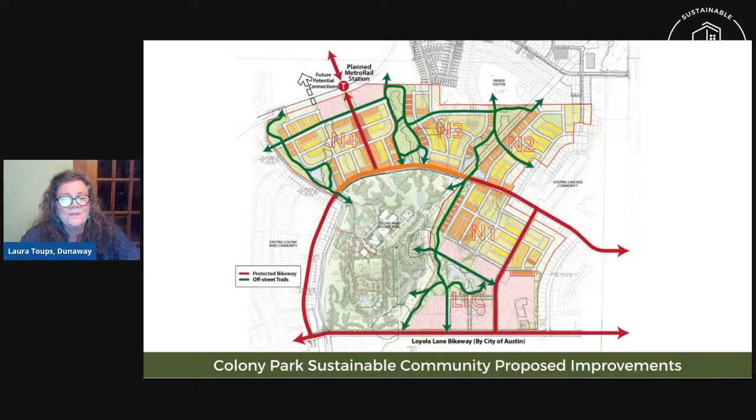Next, we're going to have a discussion of safety and connectivity goals. The Transportation Department will talk about what data they use to help advise how to improve safety here. Laura Dierenfield will be presenting. Thank you, Laura, and thank you all for being part of tonight's broadcast, and for anyone watching this afterward.

This section talks a little about the safety and connectivity goals that speak to those key pillars Laura mentioned a moment ago. It's truly been a humbling and great privilege to be part of this team with so much from the community represented in this plan. As far as safety and connectivity, the goals here are to make a safer street for everyone who uses Colony Loop Drive, to connect it so it can offer the access needed, from Loyola Lane to Decker Lane, to and from and within this beautiful existing and blossoming community.

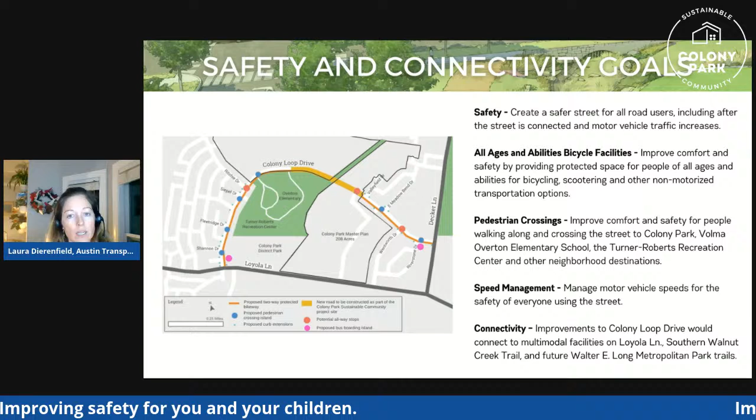Along the way, it will be a street that can offer an all ages and abilities bicycle facility, which is to say it is a street that a child or someone just new to bicycling, or someone who might be a little unsure, would feel comfortable being able to bike along this street to get where they need to go, whether that's to the store or to school or to a friend's house.

Additionally, you'll see several locations where new pedestrian crossings are proposed to better access the existing and new assets that would come on through the Colony Park Sustainable Plan, to include the new park and many other amenities. Getting across the street also helps to calm the street and make it a residential street for everyone to safely use at all times of the day.

And as I mentioned, the connections, both to not only Decker Lane and Loyola Lane, but also to all of the other residential connections throughout the community, as well as to the park and trails and other community assets.

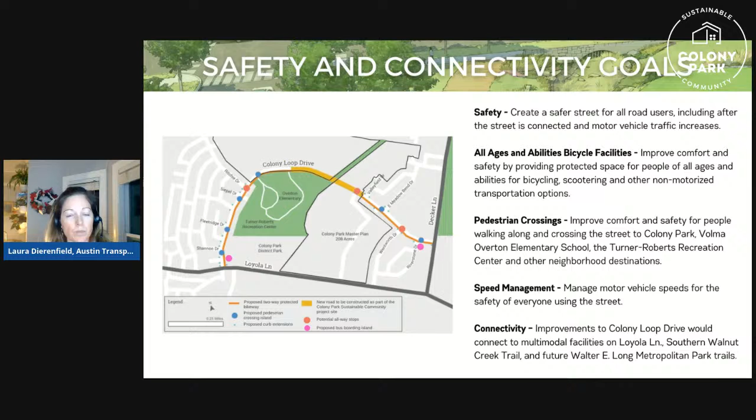The Transportation Department, in pursuing the goals of the Colony Loop Drive Complete Streets design, looked very critically at residential parking. This is an important function of any street, especially one that serves people getting to and from their homes. But it also needs to be a street that is safe enough for everyone to use, whether it's your child going to school or if you're biking to the store.

And so we want to understand how we can best manage the important role of parking with the space we have available, both on the existing sections of Colony Loop Drive as well as the new section, to maintain vehicle access, parking, and safety. So what we do is we study parking utilization at many different times of the day, days of the week, both weekend and weekday, and we look at how much parking demand there is at those different times, appreciating that it can fluctuate depending on the day of the week or time of day.

In our analysis of parking demand, we found that generally speaking, use of parking on the street is generally below 25%, with some areas upwards of 50% parking demand. Those areas are Wentworth Drive to Riverstone Drive and Pondsdale Lane to Fleetridge Drive. But even at 50% utilization, you can modify the parking to maintain that important function of the street, but also use the space to bring about some of the safety and connectivity goals that I mentioned.

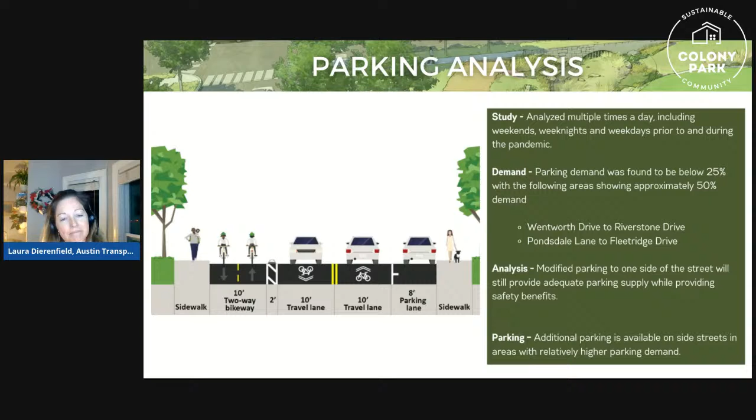It also allows for biking side by side, as a child and a parent might want to bike together, or if a spouse are walking together or biking together, there's ample space to do so.

And we know from research that these crossing islands can reduce crashes by 40% because of those properties. Parking, as I mentioned, would remain on the north and west side of the street, except in some areas where the taper will allow for these new crossing islands to be offered, to help get people across the street to the school and the park and other destinations.

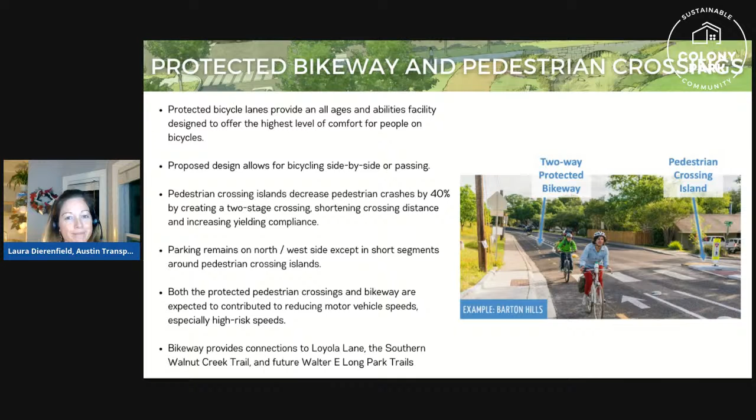And so I'm going to turn this over now to Candace Craig to talk a little bit more about the proposed improvements.

Thank you, Laura. So the purpose of the next series of slides is to show the location of the proposed improvements, renderings of each type of improvement, typical street sections, and a bird's eye view of part of the plan.

So on this slide, you can see this is a map that shows the location of the proposed improvements. Don't worry if you don't know what some of these improvements look like. I'll show you pictures of each of these in the following slides.

So first, in the light orange, is that gap section that Laura Toups had talked about earlier on in the presentation. This is the connection of Colony Loop Drive, so you'll have a continuous road from Loyola to Decker Lane.

Next, along the east and south curb line is a two-way protected bikeway. Where you see the three red octagons at Ritchie, Wentworth, and a future intersection in the gap section are potential all-way stops. Next, where you see those little blue dots are the curb extensions, sometimes called bulb-outs. I'll show you some pictures of what that looks like in the next few slides.

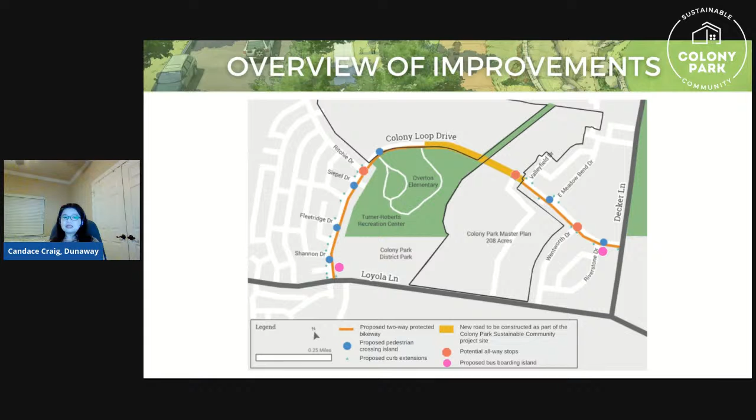So the next few slides are examples of what these roadway improvements look like. This first one is a rendering of the refuge island proposed at Colony Loop Drive and Siepel. The people you see walking across the crosswalk are heading east toward the new pedestrian bridge to the new park that opened this year in March.

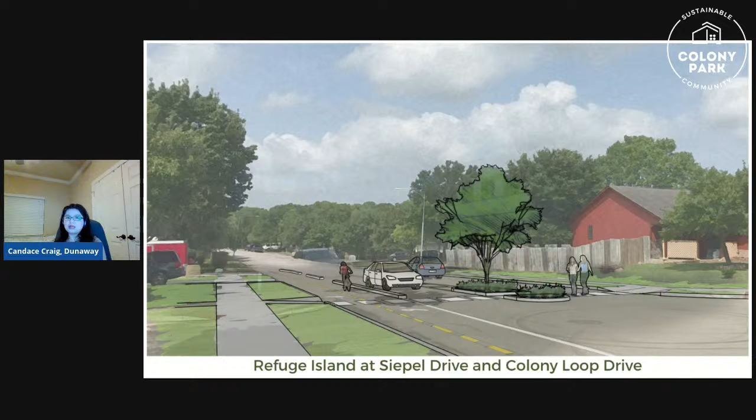The refuge islands, I'm going to repeat some of what Laura said, so bear with me. The refuge islands work by encouraging slower, safer speeds where you have people crossing the street. Pedestrians have a safe area in that curb island between traffic lanes and can cross one lane at a time.

So this one is a new refuge island over at Volma Overton Elementary. Same concept as the previous slide. Notice that the two-way bike lane is located on the school side to reduce conflicts with cars on the street, and there's a barrier curb that protects cyclists in the bikeway.

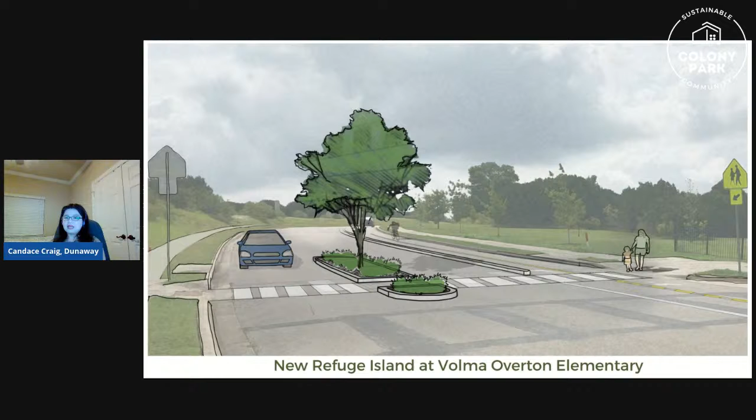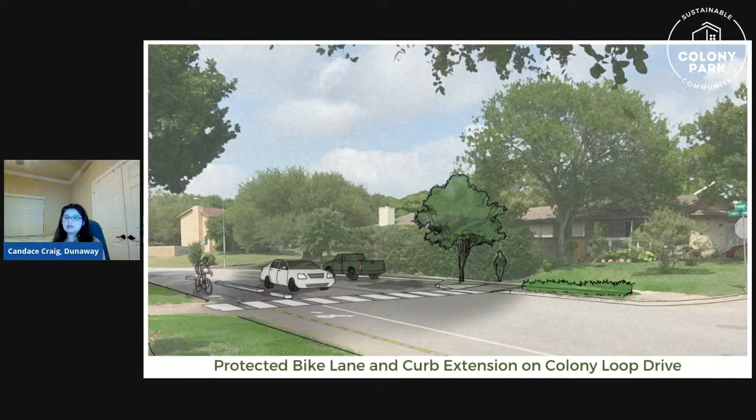This is a rendering of an intersection with the protected bike lanes and curb extensions. You can see in this picture that the curb extends out into the parking lane to meet the traffic lane, and they shorten the distance from curb to curb that a pedestrian is in traffic.

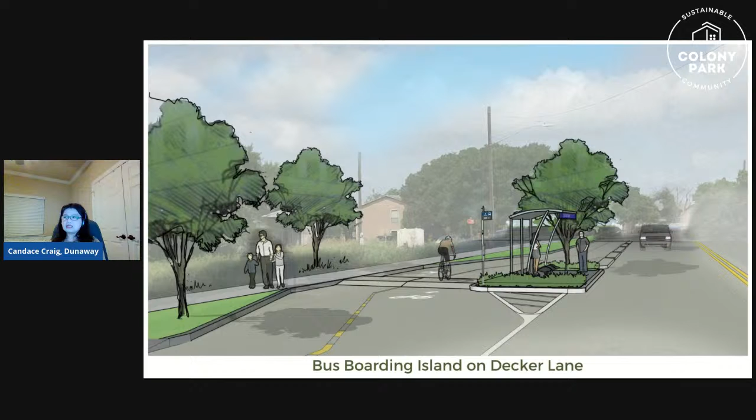So on the picture on the left, you can see sidewalks on both sides of the street, two-way protected bike lanes along the east and south side of the street, which is the school side, and parking along the west and north side of the street. The picture on the right shows the street section at a refuge island. We'll have 5 or 6 foot continuous sidewalks on both sides of the street. To make room for the refuge island, the traffic lane shifts into the parking lane. We'll see this from a bird's eye view in the next slide.

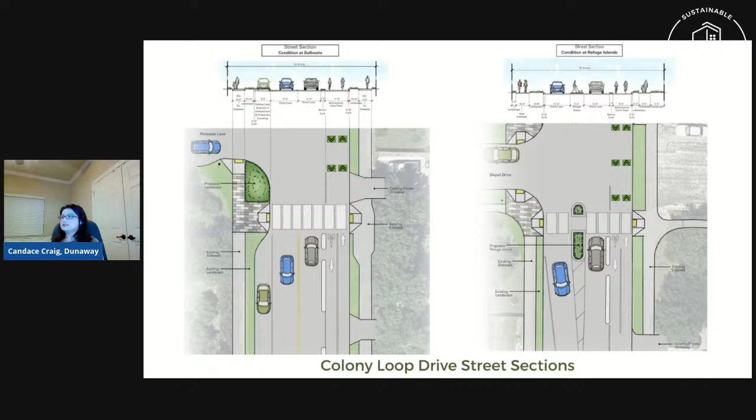Okay, so this plan shows two blocks with a refuge island at Siegel and Colony Loop Drive. The top of the page is east. The arrow at the top points to the way to the new pedestrian bridge to the new park, school, and rec center. To the right is heading south toward Loyola.

Starting at the left of this drawing, you can see Ritchie, and you can see the curb extension in plan view. Curb extensions shorten the distance from curb to curb for pedestrians across the street. The block from Ritchie to Siegel is our typical block with 5 or 6 foot sidewalks on both sides. Along the curb line at the top is a two-way bikeway with a barrier curb, separating the all ages and abilities cyclists from the car traffic lane.

Then you have the two drive lanes and the parking lane along the west or north curb line at the bottom. Moving along to the next block from Siegel to Townsborough Drive, we show the crosswalk with a refuge island.

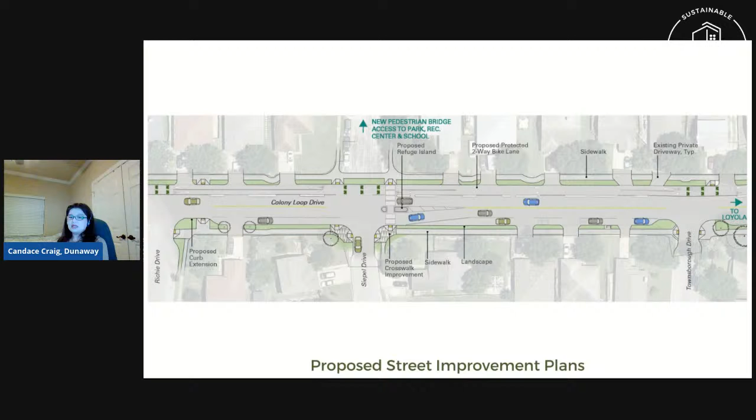So that's all I have on this part of the presentation. Here we can go to the next slide, and I'll turn it back over to Laura Toups and Laura Cortez.